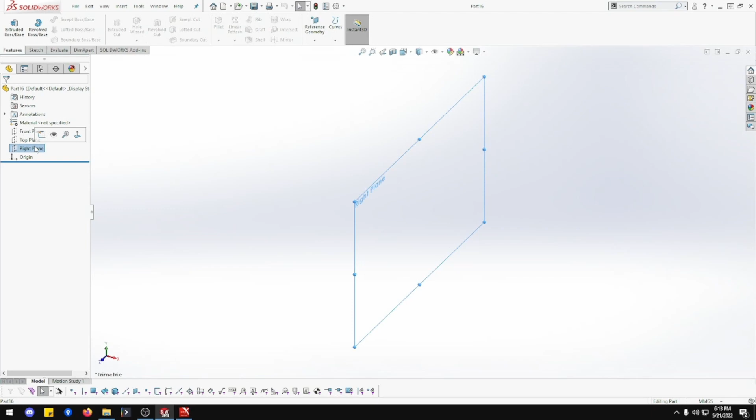Okay, so let's do the right hand side. This is going to be very interesting. So this is like a small circular piece, big circular piece, but lined down there, but it bends halfway through on the side. So we'll probably do the side portion first, because try to do the other angles. Let me just get into it.

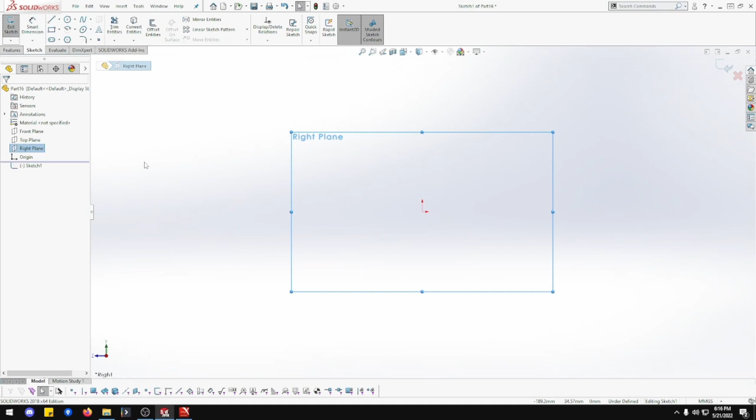So it's going to be 3 mil wide. So let's do a line here. Just cross there, down, angle, down, cross, up, and up. There we go. That's not quite, let me fix that. There we go, okay, so it's going to be 3 mil wide.

Let me just zoom in. There we go. Smart dimension. It's going to be 3 mil. It's 3 mil all the way through. Yes, it is. 3 mil.

Now this line is actually parallel. Okay, let me do this point, should do actually. There we go. It's actually, so this side here matches this side, so it's bent exactly like that.

Now this is the fun part. What are the measurements? We've got some measurements missing out of this one. Okay, so we've got. Okay, it's 41.

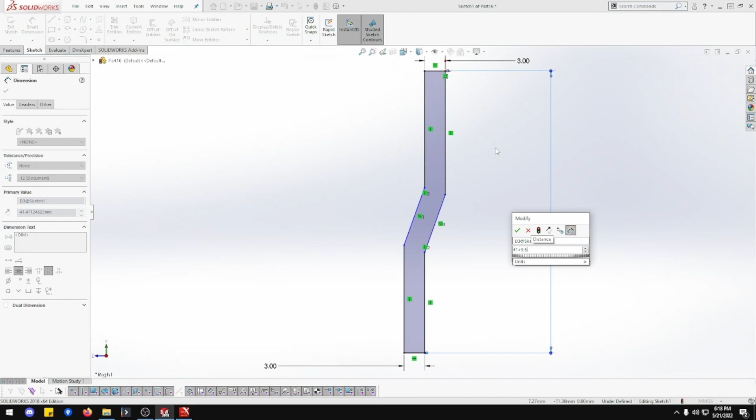Let's have a look at something. Let's do it from here. From here to here, it's going to be 41 plus 9.5. You've got to raise up here 9.5, plus raise down here 13. Wow. What the heck?

Let me delete that bit. Let me take this down. That went weird for some reason. Try that again, can't remember what the measurements were now. That line and that line. So it's 9.5 plus 41 plus 13. 63.5. Perfect.

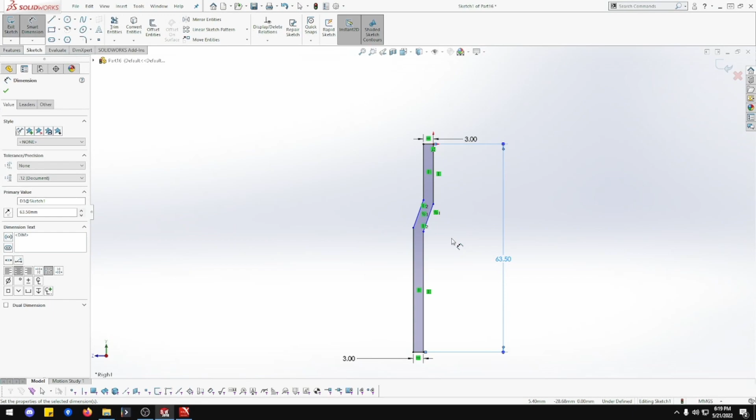The only thing is, what is the measurement of there? It doesn't show. It does not show. Okay, that one there, I'm going to say it's equal. That one there is equal. Nope, that didn't work.

Okay, let me try something, because it's going to be 3 mil through there too. So if we go from this line to this line, smart thing, that one to that one, it's going to be 3 mil. But the thing is, what is this one going to be, or what's this one going to be? So it's 14, so 9, 18, 19, so it's got to be more than 19.

What is that measurement at the moment? Yeah, that's way out. That is way out, it does not show. Yeah, there's a lot of measurements missing on this one, so have a quick look at something.

Okay, I'm going to take a wild guess, just comparing this part here with the hole. That's not what, that one. That one, what is it? Oh boy, I'm going to take this as 13 here. Let me try something, it's doing the weird thing.

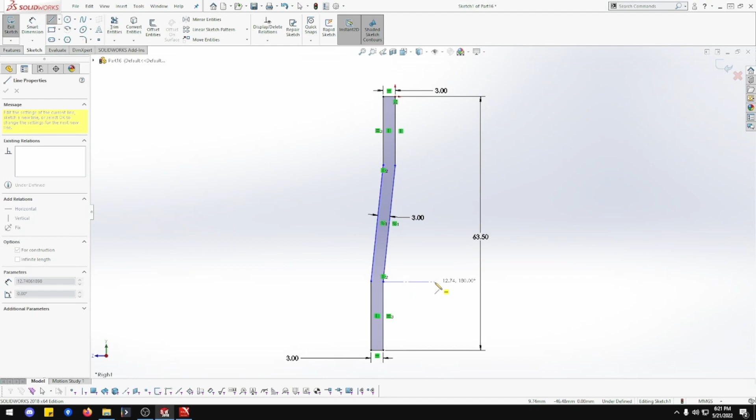So that one goes there. There we go, let me just delete that one. There we go, this one to this one is going to be 13. Actually, that's about right, the hole down here is about the same width as this here.

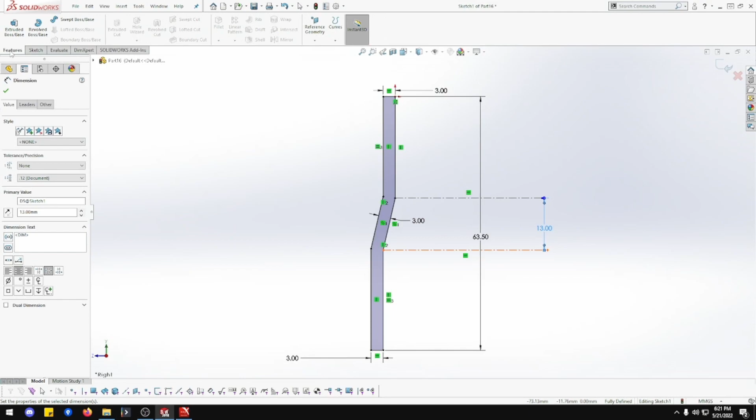So, okay, so radius, no, not radius, the thickness, extrude, mid-plane, it's going to be radius 26, radius 13, so it's going to be diameter 26, and done.

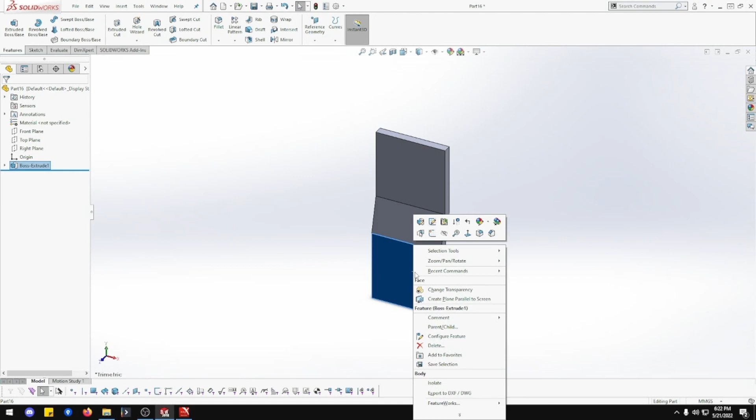Okay, now the fun part. Let us do this one. So first off, I'm going to put the holes in.

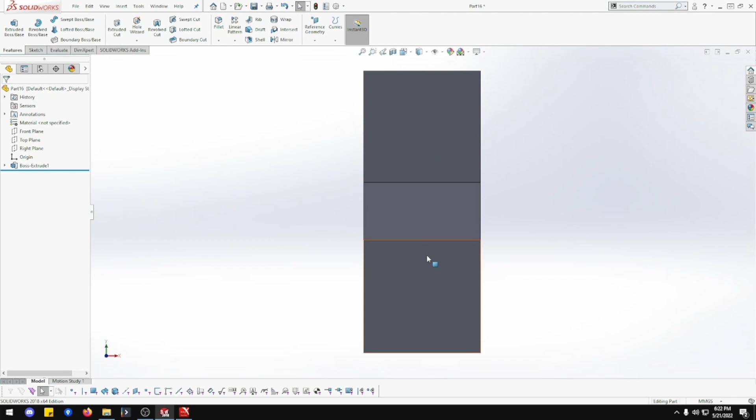Hold on, this can be interesting. Let's do this one here. Let's put a circle there, circle there. Let's put both circles.

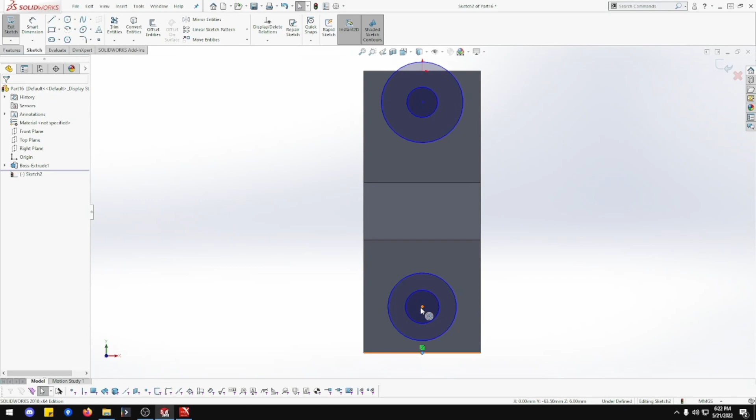Okay, so we got that one, and that one is going to be, bang, beautiful. Yeah, I can change that, it's fine.

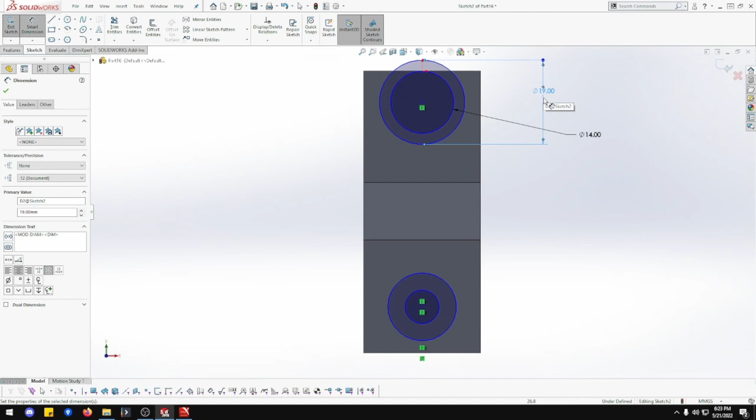Okay, so let me do this circle first. That's going to be 14. This is going to be 9.5 by 2, that's 19. That's good.

So that means that one there is going to be 9.5. Perfect, that's in the correct position now.

Now we want this circle, which is 10. This circle, which is 13 radius, so 26 diameter. This point to this point will be 13. Bingo, that's correct width there, correct width there. Nice, that works out good.

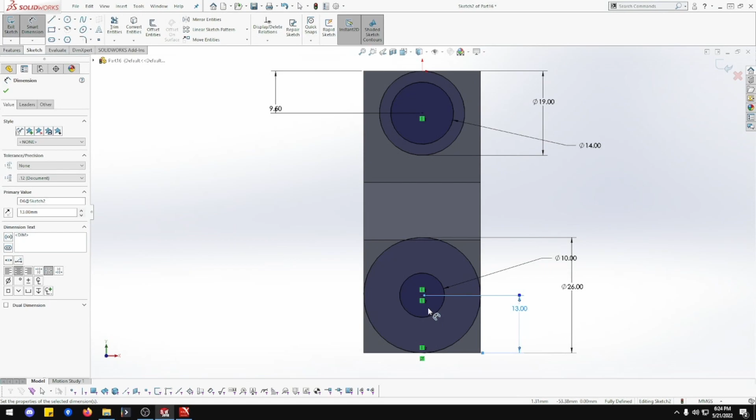Yeah, hold on, let's keep going. I think I might have a problem, but let's just see what happens.

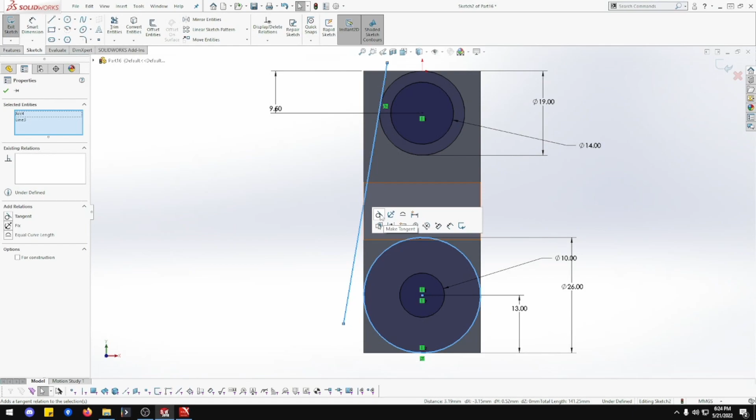Let me do that one to that one. Let's do... that's tangent. That is tangent, beautiful. Tangent.

Move that one there, thank you. There's one outside, that way I know it's going to be right. Tangent. Okay, let me go to trim.

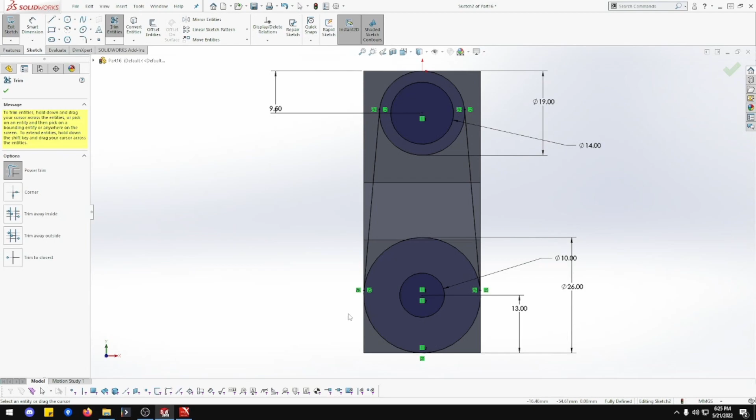Trim that one, trim that one, trim that one, trim that one. Trim that one, and trim that one.

Now we want this cut through. We want this out, and they are gone. So can we do that? Let's see what happens if we do a cut.

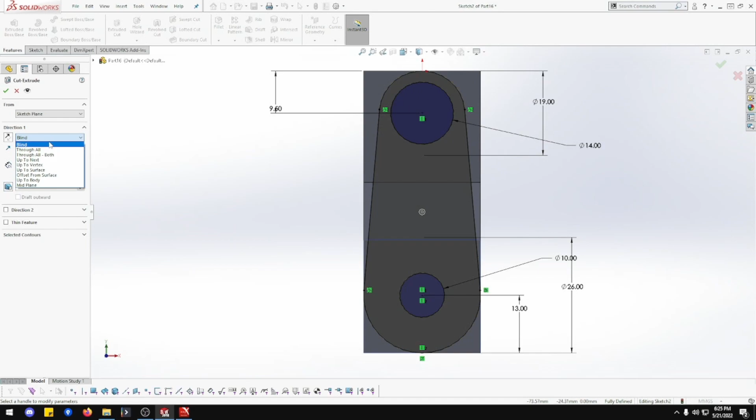Flip sides to cut. Through all. Let's just see what it does. Oh, that worked. Why, that confused me, that surprised me.

So, okay, that's looking good. That's looking like it is right. This measurement here might be a little bit out, but that's pretty much what we're after.

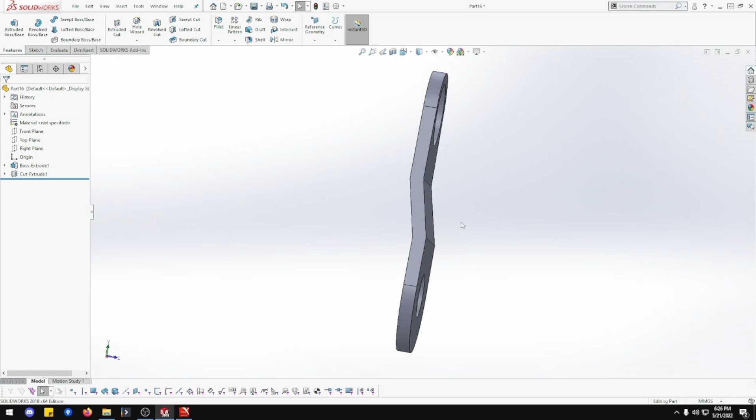So we want the ziggy thing. So this is where I got the measurement from. It's like 9.5 to the center, or radius. Then it's 41 to the center, then it's 13 radius. That's how I got the height. So that worked out pretty good.

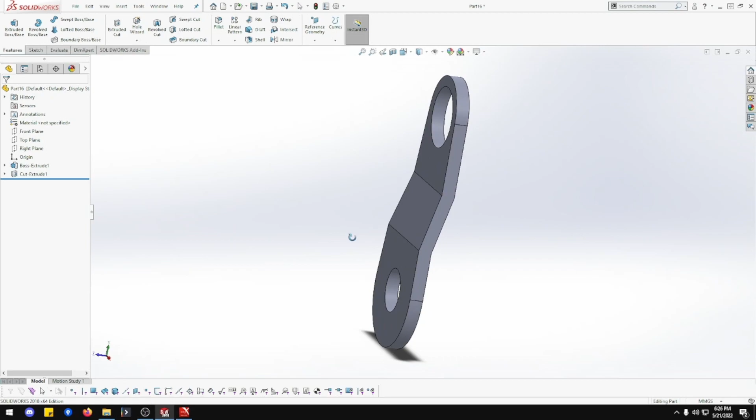Okay, I think we're done. That worked out, I wasn't too sure I was going to get that done like that. So we learned together, so I think you come along.

Hold on before we do. Yeah, that's all we need. That's all we need. So I think this measurement here might be out. It looks actually...

Oh, let's have a look at something. Let's have a look at something. Here's a little trick too. We can go to, where is it, evaluate, measure. From that line to that line is 13 millimeter.

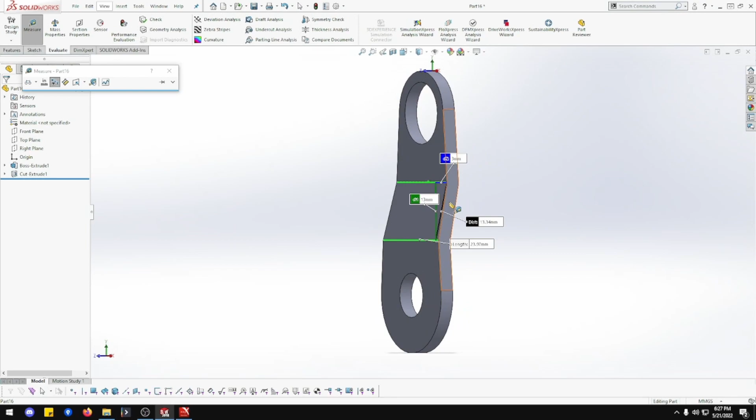Not too sure, see it's straight. Green is 13 millimeter. Height is 3 millimeter, and the distance on the slope is 13.4. So that's 13 mil, that's 13. So that's the same as that.

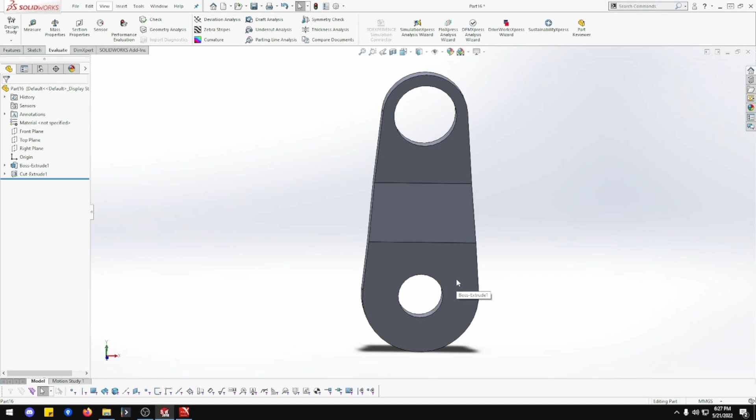Look on the top. Okay, doesn't look that way, that's all. It looks bigger than that. What was that? Yeah, look at something.

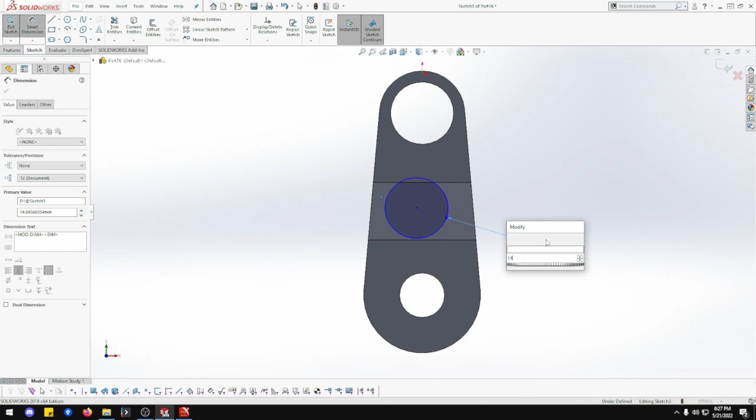Just do that. 13. Move it in, yeah, that's it. Okay, oh.

Delete that one, we don't need it. Oh, come on, just delete it. Thank you, almost. What? Oh. We still need sketch, I thought we were out of sketch.

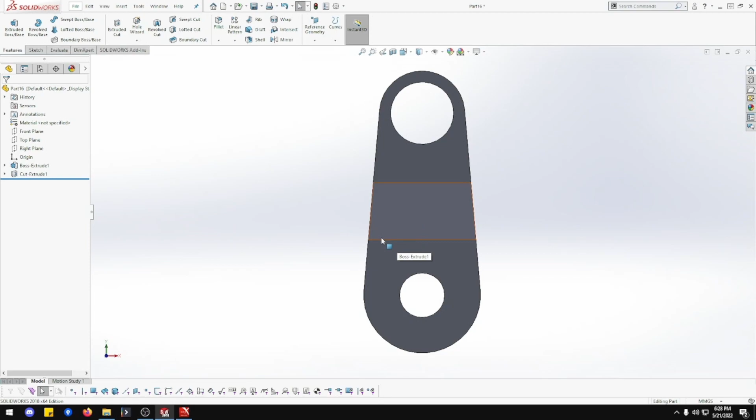Yes, okay, so we'll leave that now. We'll set the situation later on and change if we have to. So that is that piece done.